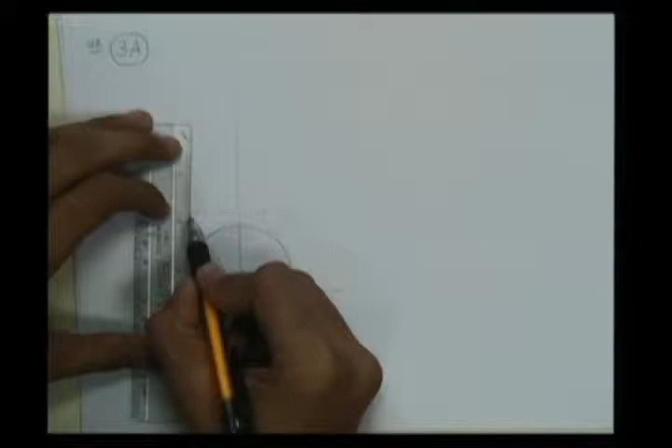Imaginary generator would be given priority as compared to the center line, and height is known to us. So this is the height which is given for this cone. So this is given data.

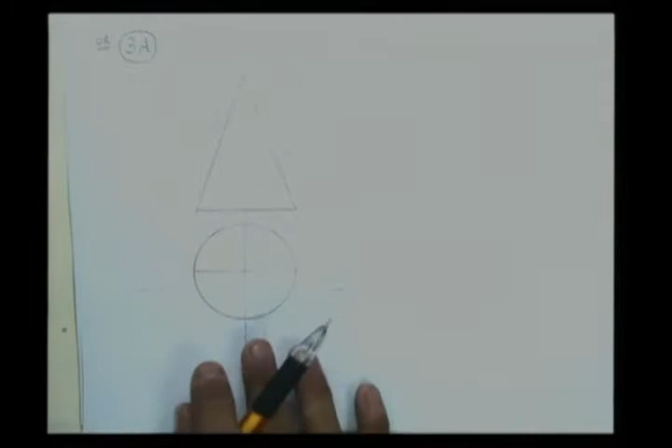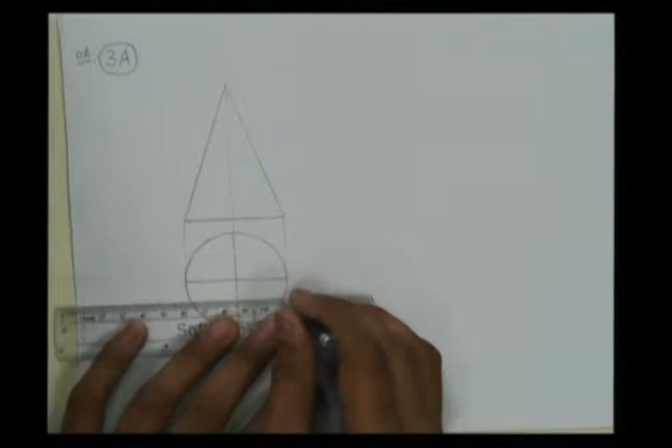A cone, right? And a cutting plane is given here, which is at a distance of 10 mm from the axis and parallel to VP. So that should be drawn like this. This is the cutting plane, this portion is cut, and here the cutting plane symbol should be drawn: 2 long dashes, 2 short dashes and 1 long dash. This is the standard nomenclature to express the cutting plane.

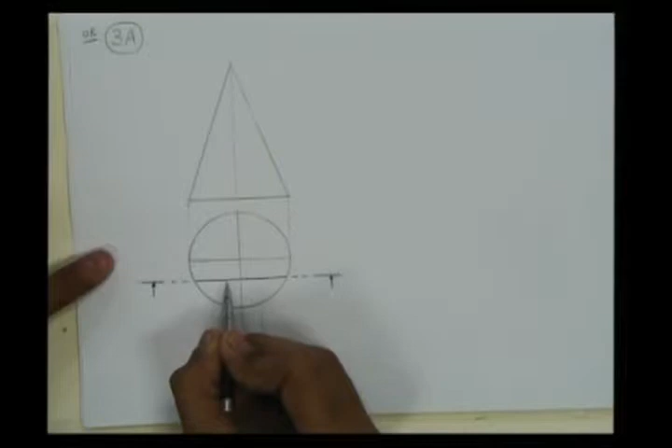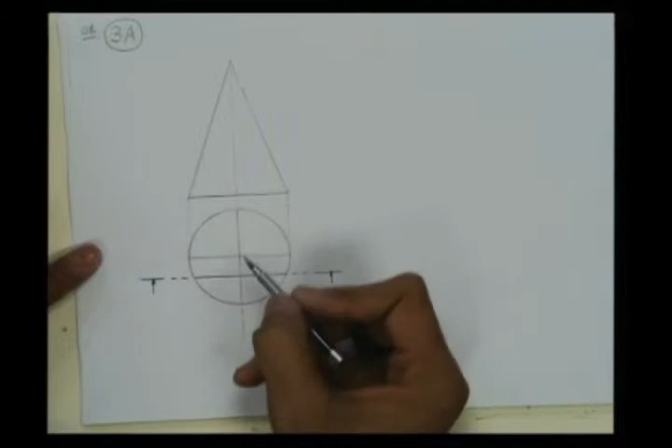This is the cutting plane. You can draw arrows here as well. It means that this material is removed and this material retains there, and it is given that the cutting plane is towards the observer. So here we have to draw on this side only. You can draw this cutting plane over here also; from the center on this side also a line can be drawn, but here it is clearly mentioned that the cutting plane is towards the observer, means towards us. Hence we have to draw this cutting plane on this side only.

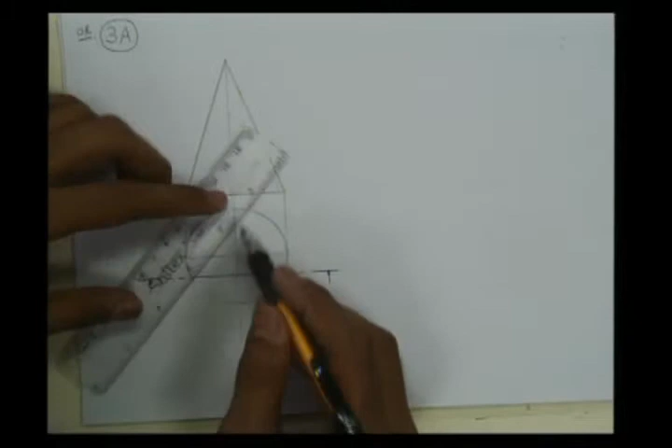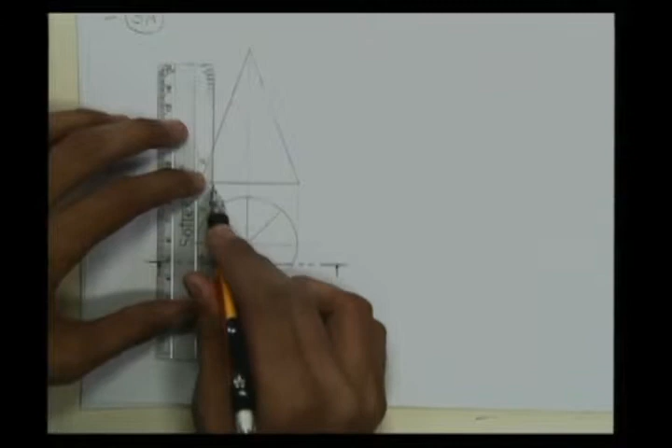You can lighten this portion as well, because that portion of this cone is the removed portion, and this is the top view. Now to find out the points of intersection, we have to draw imaginary generators over the outer periphery of this cone. So for that, let me divide this cone into equal number of parts. Generally we divide into 8 equal parts, but for a bigger figure you can divide into 12 equal parts also. But by dividing into 8 equal parts we can save much more time, and draw the front view of these imaginary generators from the top view like this.

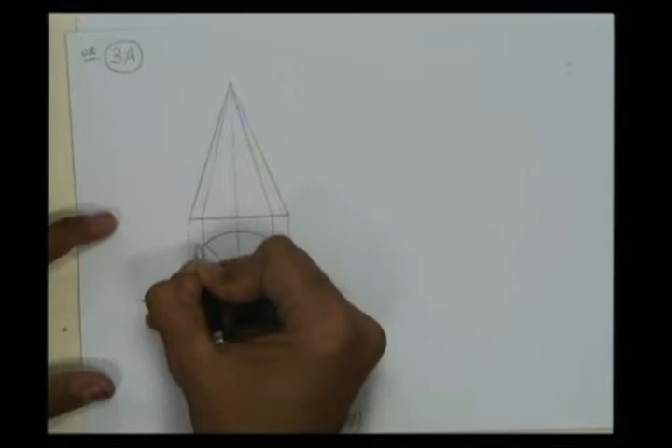So these are the generators drawn over the outside periphery of the cone. You can name them starting from here. So this is A, B, C, D, E, F, G and H. Similarly A dash, B dash, C dash, D dash, E dash, F dash, G dash, H dash, apex point O dash, and this is apex point O.

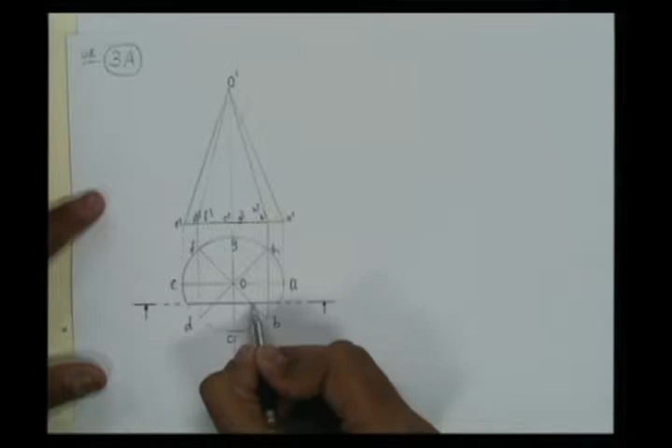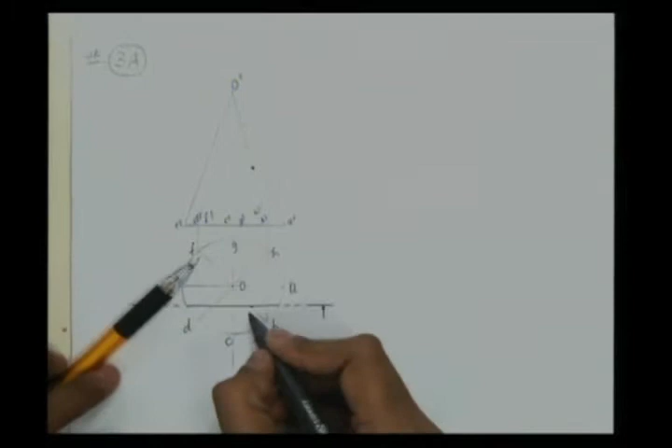Now find out the points of intersection between this cutting plane and imaginary generators. See, these are the imaginary generators OA, OB, OC, OD, OE. Here this cutting plane cuts imaginary generator OB at this point. So from this point draw a straight vertical line from here to here, and on O dash B dash it will cut somewhere here. So mark that point. That is our point on OB, O dash B dash. This is the point in top view, and from that point draw a straight vertical line that will cut O dash B dash at this point.

Similarly, OD is cut by the same cutting plane over here, right? So transfer this point also. Draw a straight vertical line from this point that will cut O dash D dash. This is generator OD. So this point will cut O dash D dash at one point; it is somewhere here. So this is another point. So we have picked up 2 points. What about the rest 2 points?

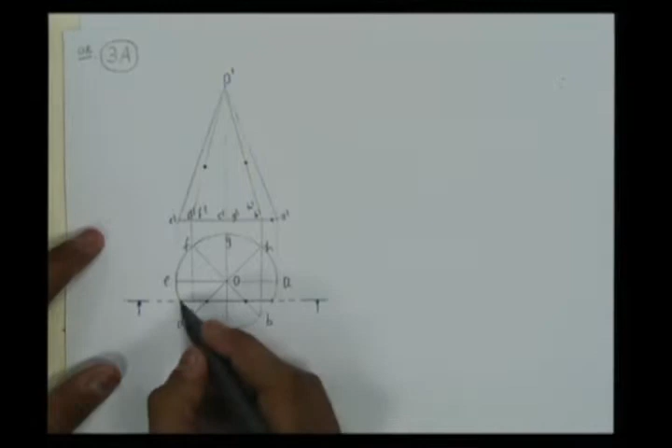One point is here over the periphery of the circular base, between A and B. So from here draw a straight vertical line between A and B. This is the first intersectional point. Similarly from here draw a straight vertical line that will cut the base somewhere here. So that is another point. So we have picked up 2 more points over the base of this cone. Now the last point, this point. Here 5 points are there: 1, 2, 3, 4, 5.

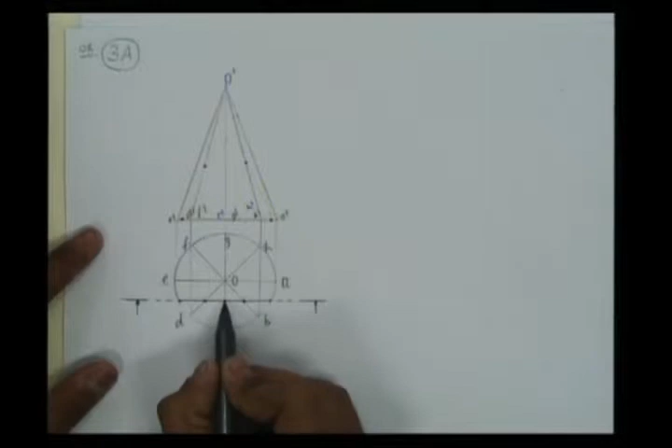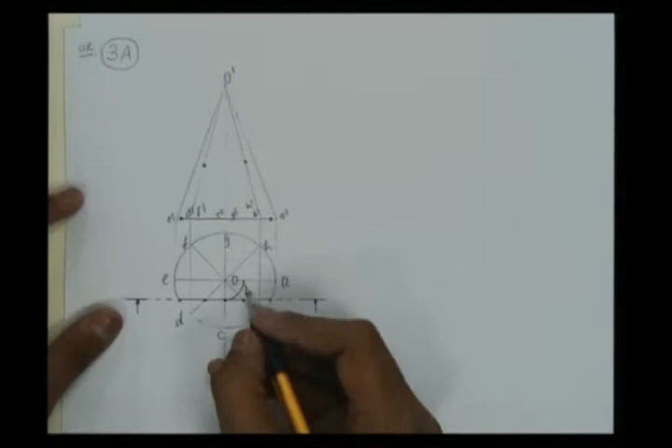How to identify this point in front view? For that, let me use the concept of true length or true position of the point. We need to find out the true position of this point in front view. So make its top view parallel to XY line: take O as center, O to this point as radius, draw an arc like this. In short, we are making its top view parallel to XY line, and whenever any top view is parallel to XY line, its front view indicates its true length or true position, and if front view is parallel to XY line, then its top view represents its true position or true length.

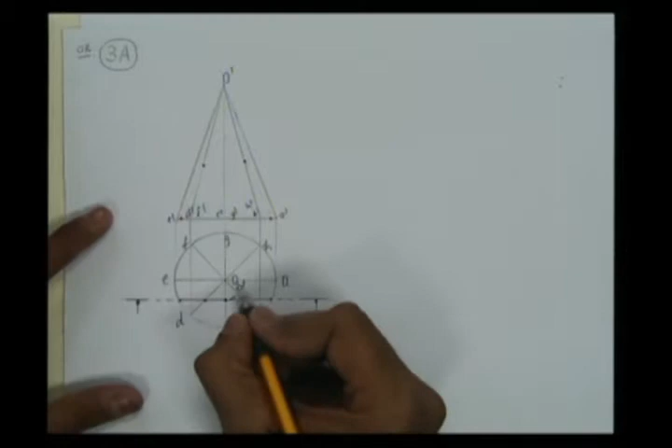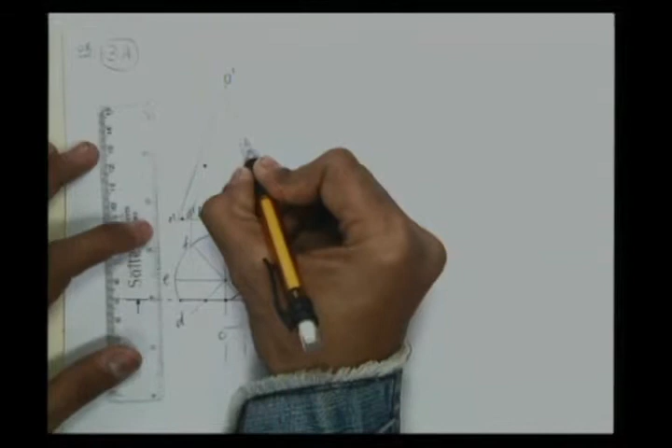After making it parallel to XY line, draw a straight vertical line from that point, like here. It will cut the generator over here, O dash A dash, because OA is parallel to XY line, hence O dash A dash is the true length of its slant edge. So transfer to true length, and from that point draw a straight horizontal line.

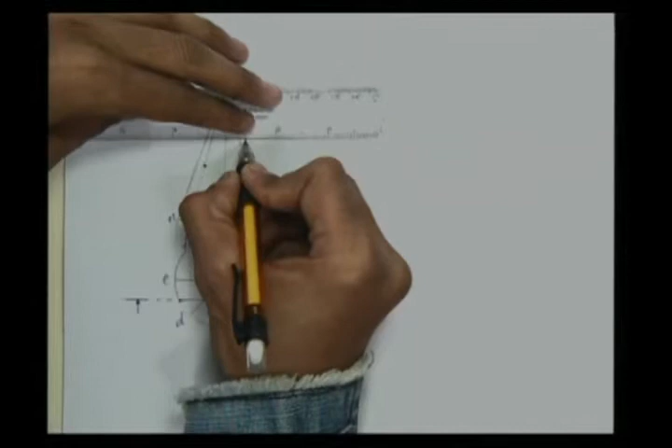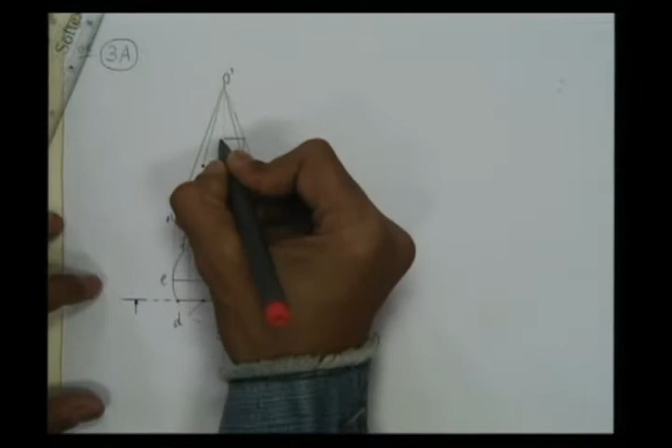Transfer it to OC, O dash C dash or O dash G dash, somewhere here. So this is our point, that is the point of intersection for our case. So these are the points. Now join all these points with a smooth curve with the pencil, and this is the cutting plane or front view, sectional front view of this problem.

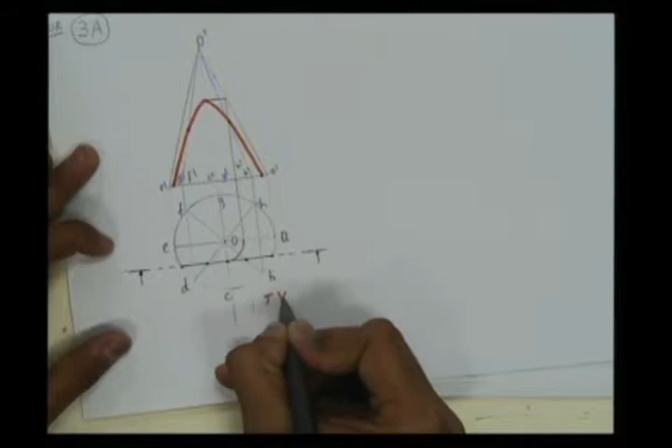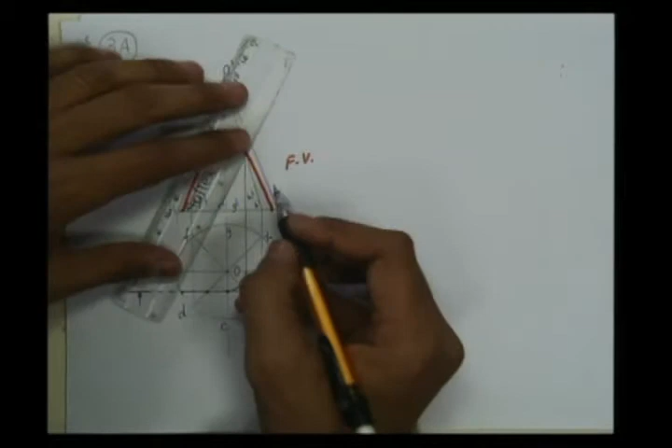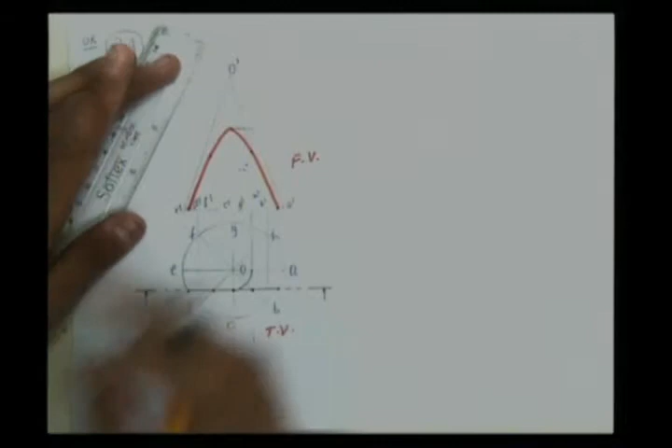This is the top view, you can write the name of the view. This is the front view as well as sectional front view, and as it's a sectional front view, you need to draw section lines inside this. Whenever we draw any section lines, all these points, imaginary generators and projection lines should be erased, and inside that we have to draw section lines which make an angle of 45 degrees with our reference axis, that is the xy line, and the distance between all these section lines should be equal, say 1 millimeter or 2 millimeter in case of bigger size drawing.

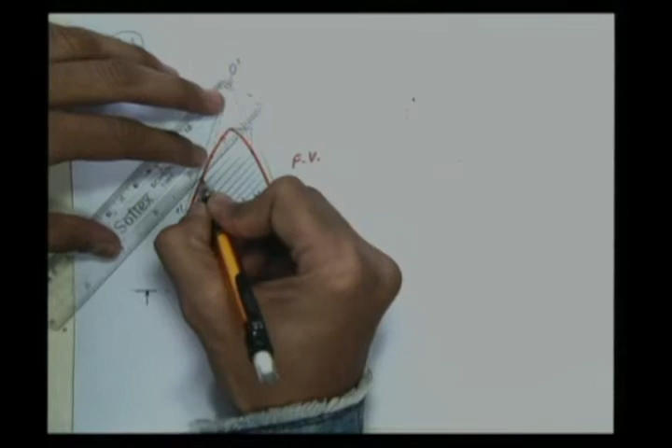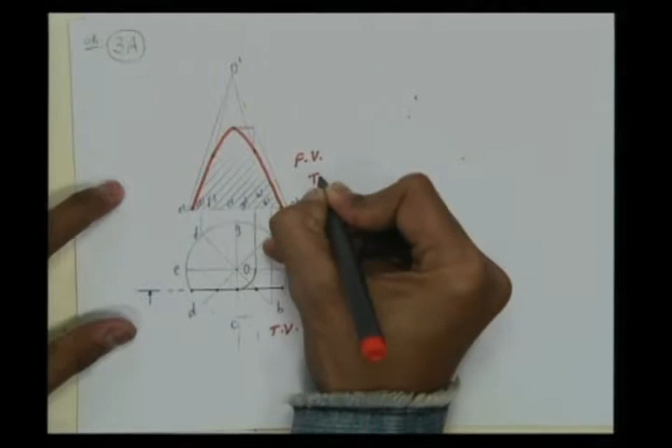And this is the front view, and this also shows the true shape of the section, because this cutting plane is parallel to the xy line, hence this indicates also the true shape. You can write here it's a true shape as well, or to make it much more clear, we can draw here another line. The area covered by this red colored portion is the true shape of the cutting plane.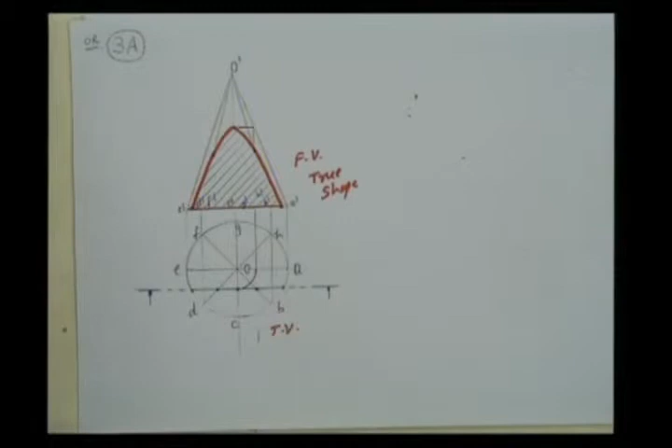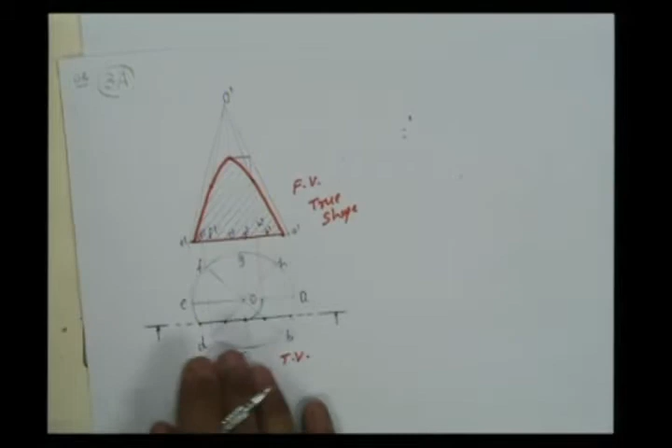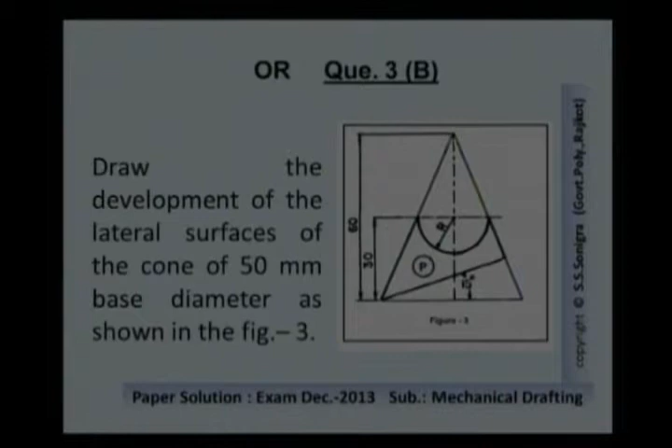Now the next question, question number 3B, and the data is given like this. 3B: draw the development of the lateral surface of the cone of 50 mm base diameter as shown in figure number 3. Here figure number 3 is given like this, and we have to draw the development of its outer lateral surface. Diameter is 50 millimeter, and this is the solution of the given problem.

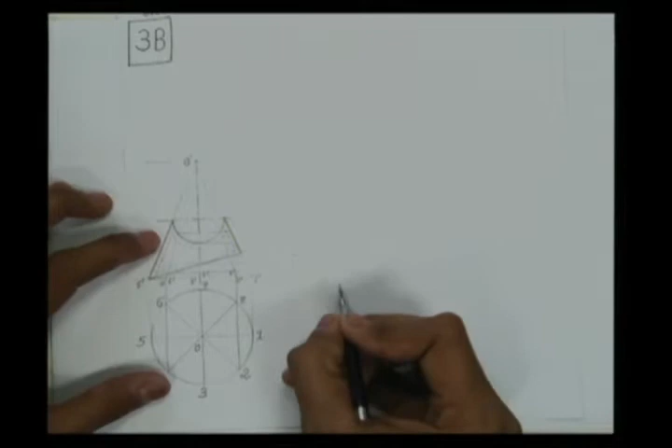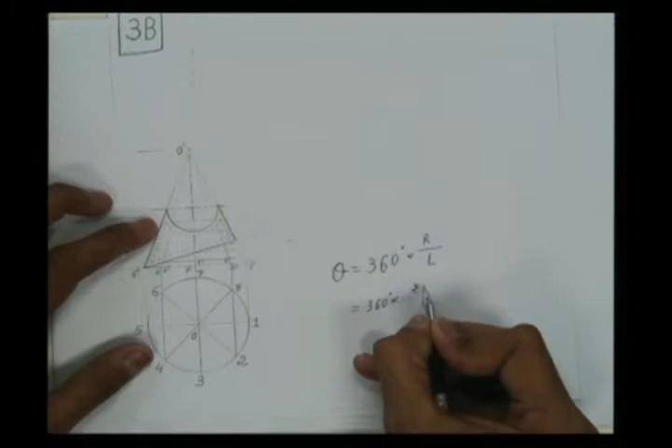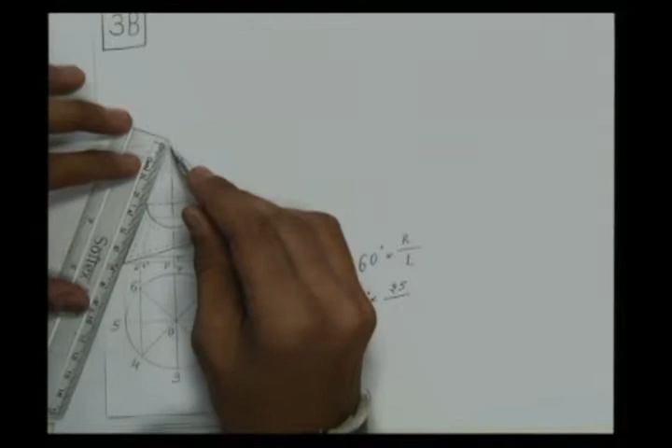Here first, this is the given data, and in this data first we need to find out angle theta. Angle theta is equal to, this equation we should remember, 360 degrees into radius, that is the radius of the base of the cone, upon length, the length of the slant edge. The radius given in our data is 25 millimeter, and the length of the slant edge is not given. Height is given, that is 60 millimeter, but the length of the slant edge we have to measure from our drawing, and here it comes out to be 65 millimeter.

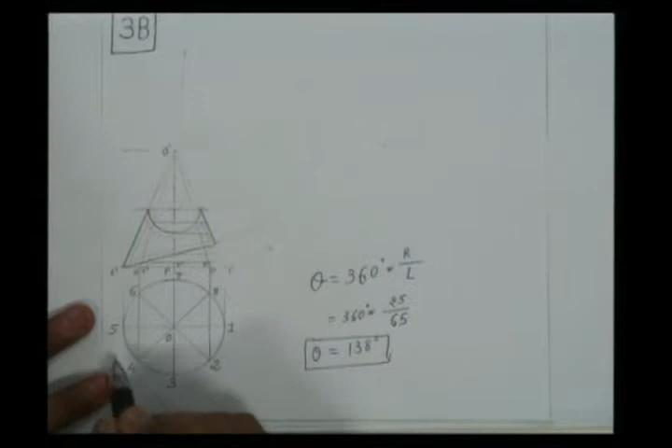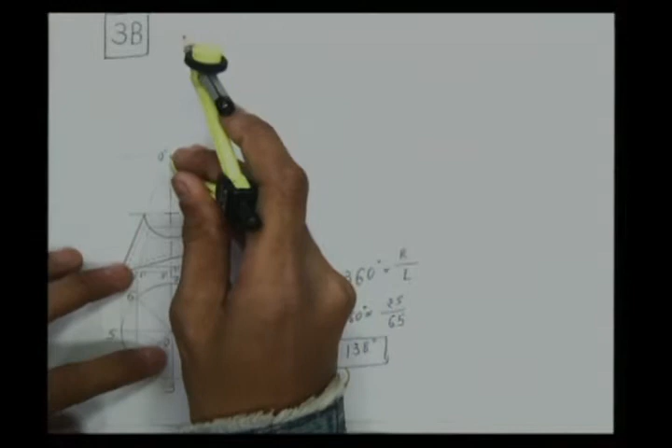So write it over here, radius upon length into 360 degrees, and the angle here is equal to 138 degrees, that is angle theta. This is the first step to draw the development of the outer surface of any cone. So this we have drawn. Now this data is given over here. Divide the top view of the cone into 8 equal parts, 1, 2, 3, 4, 5, 6, 7 and 8, and after that take O dash as the center and O dash 1 dash as the radius, and draw an arc like this.

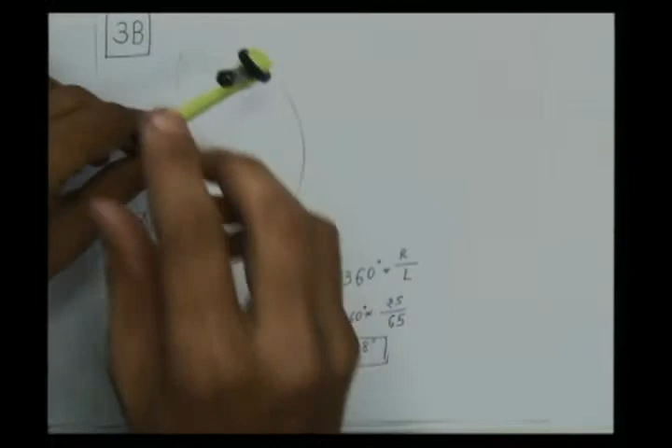Because O'1' is the true length of its slant edge, we have to take O'1' as a radius, right? And draw an angle of 138 degrees with this line O1. So it would come over here like this. This angle is 138 degrees, that is angle theta, right?

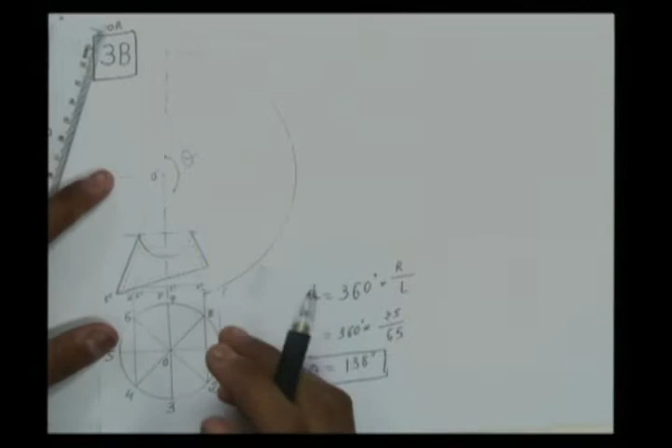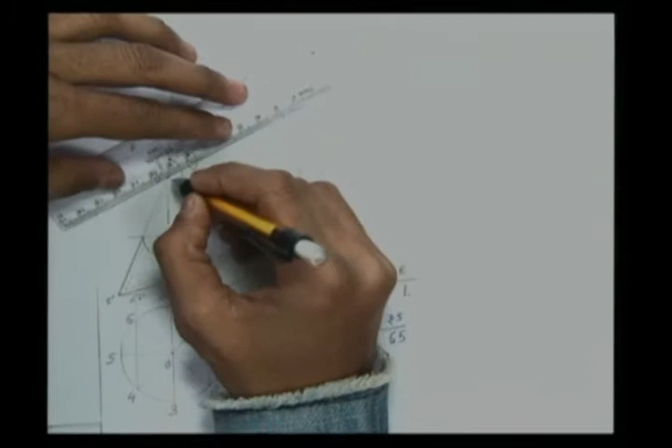With this O'1', you can draw this development anywhere over here, but for the sake of simplicity we can draw it joined to O'1' so that we can easily pick up the points of intersection. Now we have divided this cone into 8 equal parts. Similarly, divide this angle theta into 8 equal parts by any method, or by measuring the angles. You can use any method to divide this angle into 8 equal parts, whichever is convenient to you, because here the method is not the constraint. Whichever method feels convenient to you, it could be drawn.

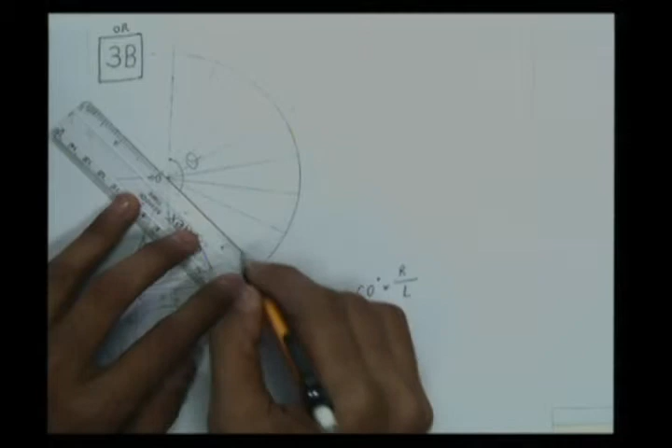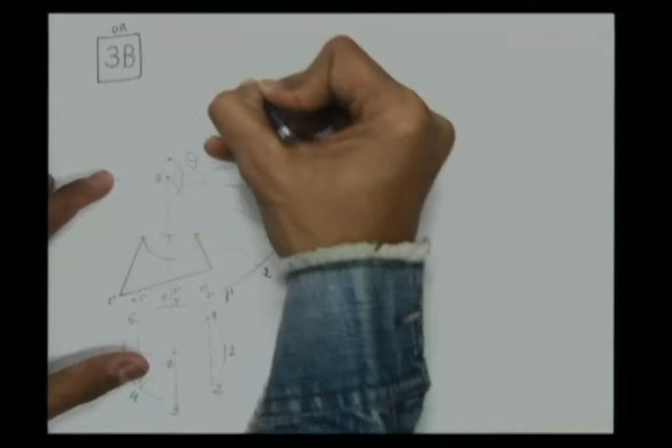And for the shortest way, first you have to divide 138 into 2 equal parts, and then divide all the parts subsequently into 2 equal parts. That would be an easier method to divide into more number of parts. Name the points. Here is point number 1, 2, 3, 4, 5, 6, 7, 8 and 1, and this is apex point O, or say O'. For development it's O, and for front view it's O'.

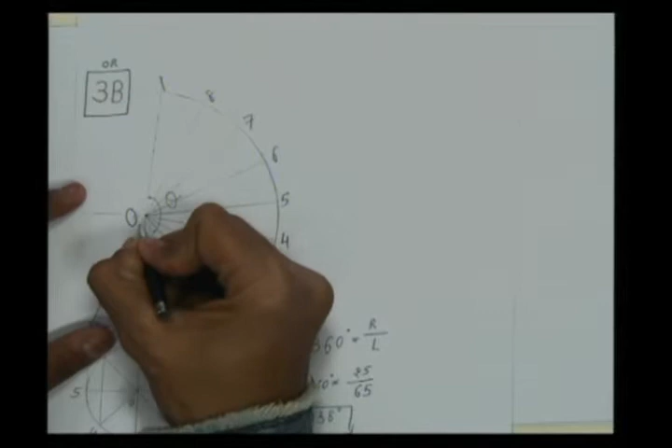Now find out each point one by one. Here this is a cutting plane, right? And this cutting plane cuts O'1' at this point. So on O1 this is our first point. Now O'2' is cut by the cutting plane at this point. O'3' is cut by this cutting plane at this point. So from these points draw a straight horizontal line. It means we are transferring this point to its true length. O'1' is true length, so transfer this point to its true length.

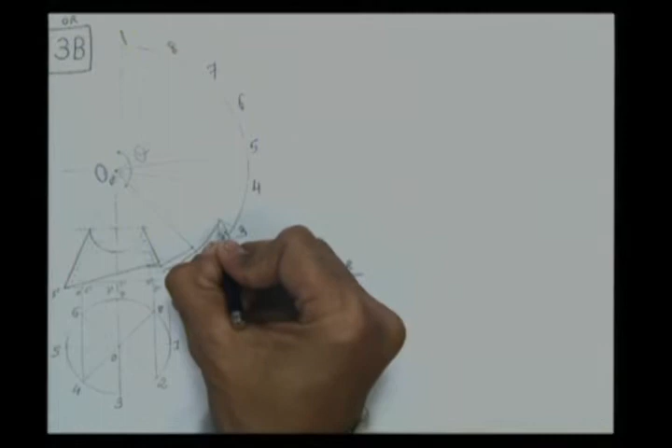From here draw a straight horizontal line, and then take O' as a center, O' to this point as a radius, draw an arc, and that arc will cut O2 at this point, somewhere here, right? So straight line from here, and after that an arc like this. Similarly, straight line from here, take O' as a center and O' to this point as a radius, draw an arc like this, that will cut O3 at this point. Similarly, point number 4 is here, horizontal line from here, and arc from here, that will cut 4 over here.

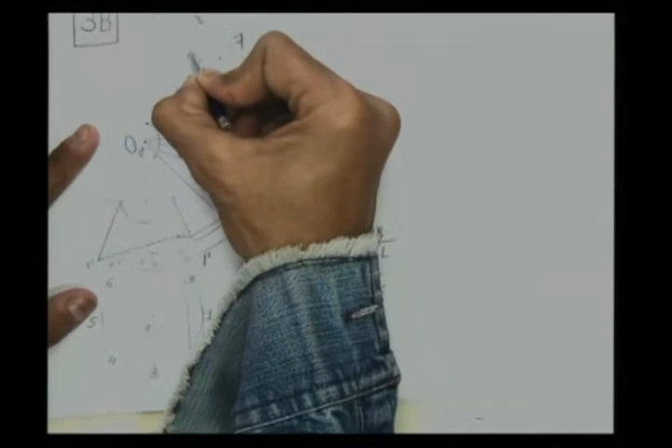Point number 5 is here at the bottom, so here is point number 5. Point number 6 is here, so you can extend this arc up to 6, then 7, 8 and back to 1, and join all these points with a smooth curve. By having long practice, you can draw a very smooth curve for such kinds of problems. It would start from here and end here with the same position. So this bottom cut portion we have drawn.

Now what about this upper cut portion? For that also the same analogy is to be employed. This is the first point, right? For this point, find out the point of intersection between this cutting plane, or say arc, and the imaginary generator, that is O'2'. So this is the point. From this point draw a straight horizontal line, and taking O' as center, O' to this point as a radius, draw an arc that will cut O2 at this point.

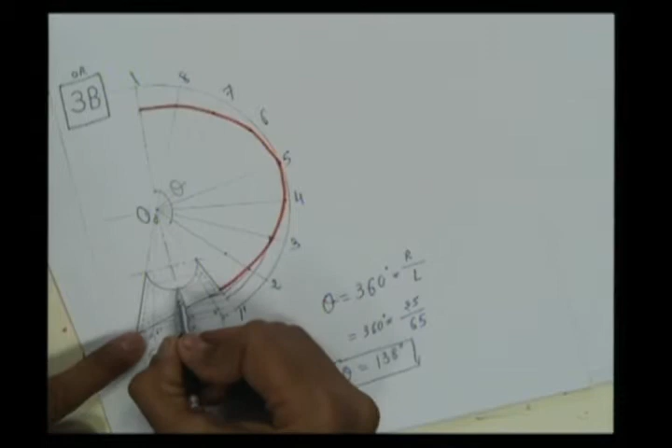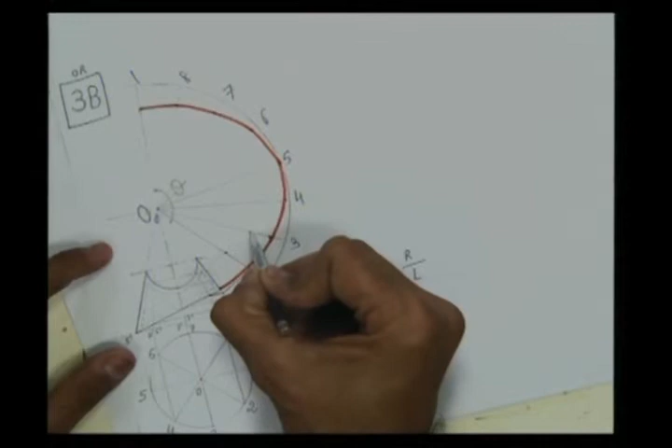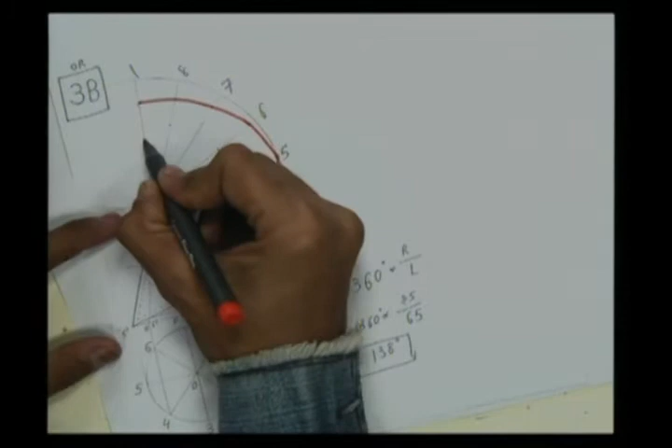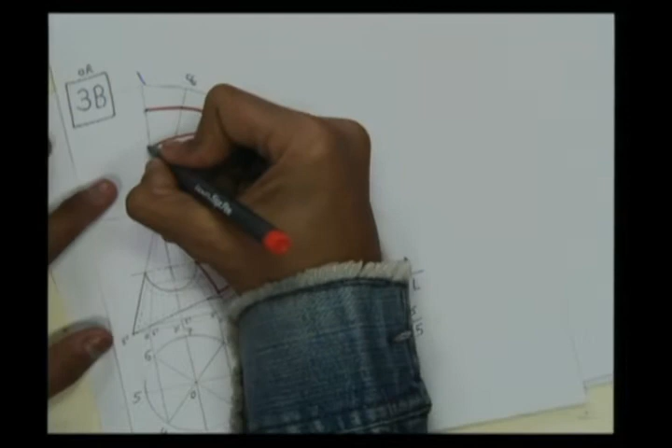Similarly, here is the point, so find out the point of intersection between this arc and O3. From that point draw a straight horizontal line, draw an arc that will cut O3 at this point. Similarly O4 is here, from here draw a horizontal line, here is 4. Similarly 5, 6, 7, 8 and back to 1. You can identify all the points and join them with a smooth curve. So this would appear like this. A straight line would be here and another straight line would be here.

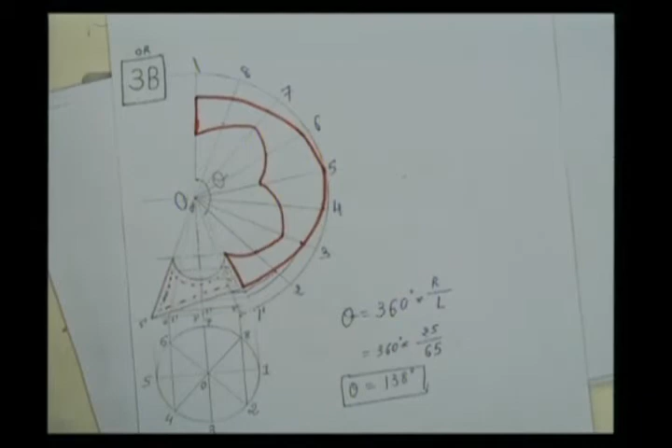So this red colored portion shows the development of the given cone if it is cut at the given position, and this one shows the solid portion which remains after cutting this cone at the given positions. I hope the solution of this problem is clear to you, and do not forget to show this calculation in the diagram. The computation should be shown here.

Angle theta is equal to 360 degrees into r upon L. Radius is 25 millimeters, length is 65. So angle theta is equal to 138 degrees. That angle should be mentioned over here in the drawing. Theta is equal to 138 degrees, and this is the development which we have drawn. Now next problem.